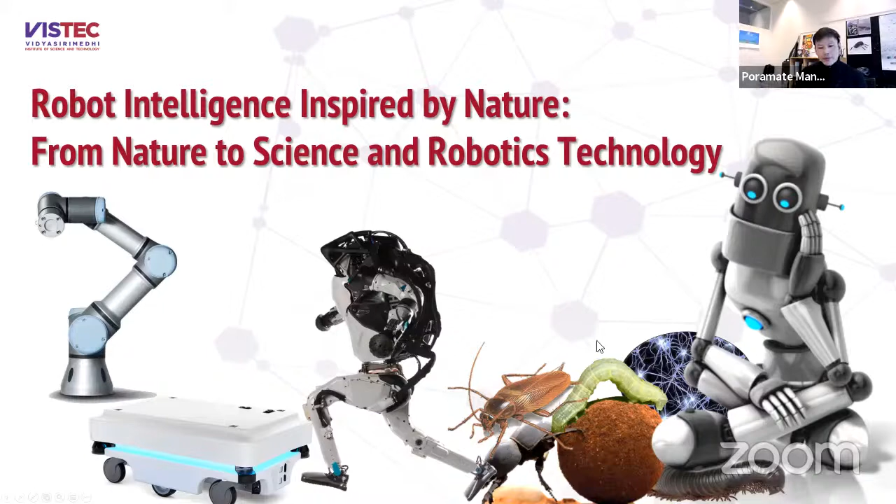But today, I'm gonna give you another aspect of robotics where instead of having an industrial arm or a mobile robot like this or even humanoid robots, we're gonna look at smaller living creatures like the animal here. So this is what we call bio-inspired robotics.

So basically in this area, people start to look at how we can understand nature, how nature moves, how animals can perform highly complex behaviors and locomotion. And from that, we can try to translate our understanding of animals or living creatures into robotics. That's what we call bio-inspired robotics, such that we can achieve new robotics technologies.

On the other hand, we can use this kind of robot to answer some hypotheses from bio studies, and that's what we call biorobotics. So basically, that's a kind of engineering-inspired biology. Today, I'm gonna try my best to walk you through three interesting living creatures.

The first one is a cockroach. This is a very little insect with 6 legs. Another animal we are working on is what we call a dung beetle. This dung beetle is a very interesting animal because it has 6 legs, and not only for walking like a cockroach as you see down there, but it can also use the remaining legs to move a very heavy ball.

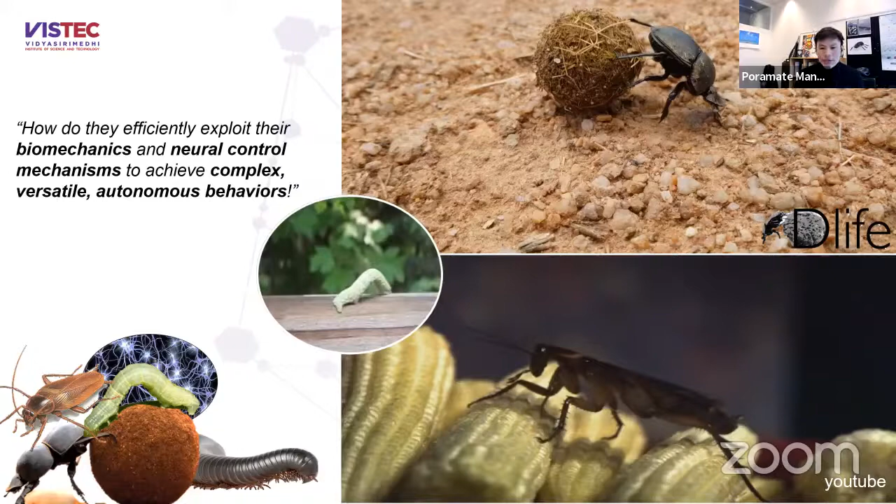And we want to understand how these kinds of living creatures can show these kinds of complex behaviors. So if you look at the principle of animal locomotion, basically we can see these two components, the first one and the second one here. So these are two main components. The first one here is about the biomechanics. Okay, this is the one down here.

Biomechanics is basically the physics or the physical body of the living creatures that can perform actions and also can perceive information. It's like the body of the animals. While the body can perform the complex behaviors, the brain, which is on top here, could also generate complex motor commands to move the body. That includes the high level control here and the locomotion control. So the locomotion control is the control that lets the system move, while the higher level control coming from the brain can try to steer the moving behaviors for complex navigation, for example.

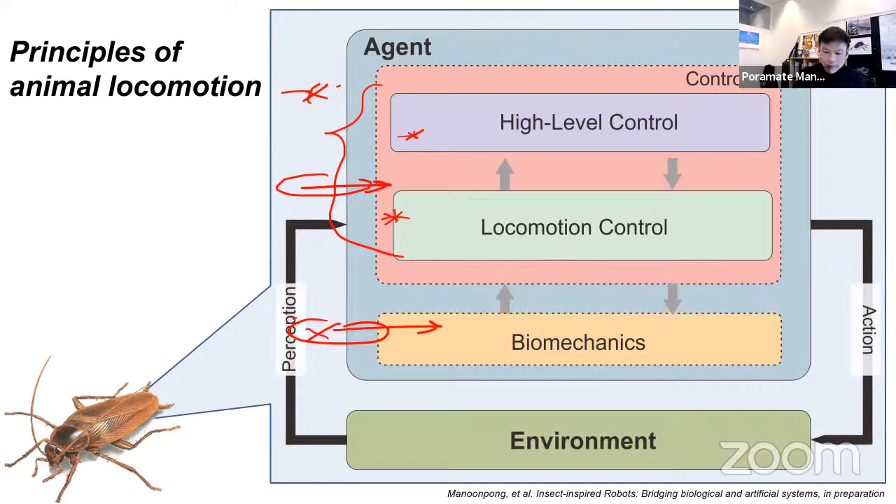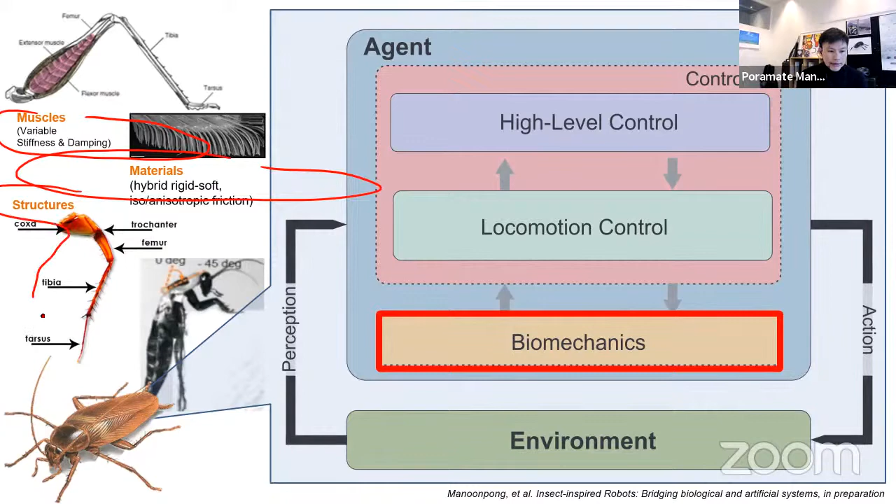And here is some information on biomechanics. So the biomechanics in principle consists of not only the body, but we cover muscles, the materials, and also even the structures, how the structure looks. Okay. While for the locomotion control, in this case, we look at the nerve system of the animals, and this nerve system can form the locomotion. It needs to coordinate these six legs. When the animal needs to be able to move, the nerve system should be able to coordinate these six legs to generate walking patterns. On top of this, we see the brain of the animal here.

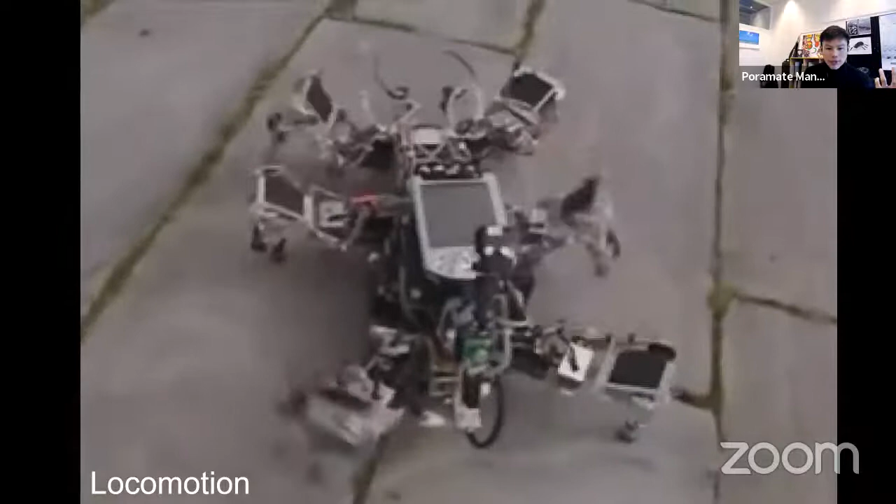And if we look inside the locomotion circuits, we basically see the neuron system. So we see many neurons that talk to each other through the synaptic connections here. And what we have achieved over my 15 years of research, we managed to translate this complex neural circuit from the animal into a digital circuit, if you like, for robot locomotion control. So by having these neural-like networks, we can achieve locomotion of hexapod robots that can mimic the locomotion of a cockroach. It can walk with six legs and it can change the locomotion patterns. When it comes to different terrains, it can change the gaits from a fast gait to slower gaits for more stable locomotion.

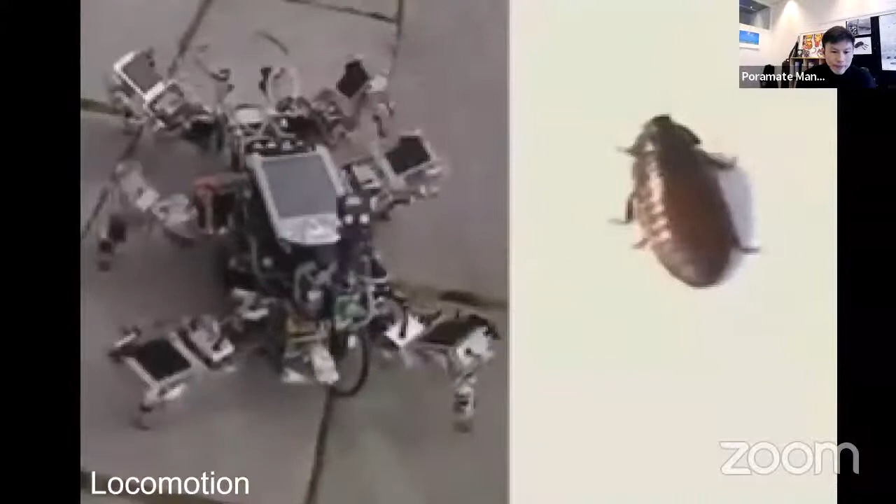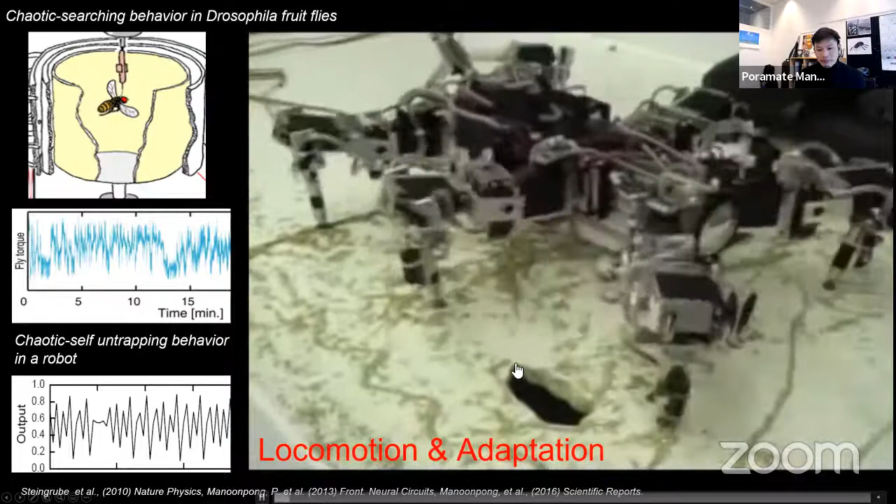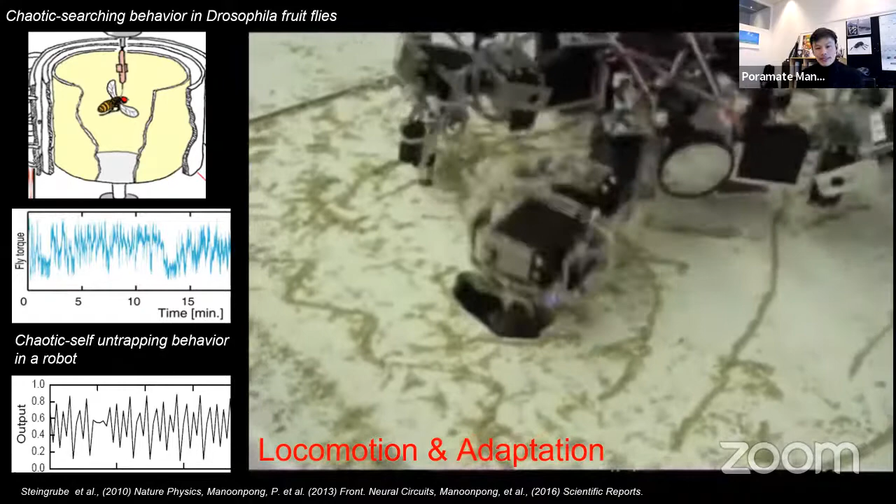We published this work in Nature Physics, showing that by using these bio-inspired strategies, we can let the robot free itself: when it walks and suddenly one of the legs steps into a hole, we let the system switch from normal locomotion into chaotic behavior. By having this chaotic-like movement, the robot can by itself release the leg out of the hole. So now this is in the chaotic mode. And now suddenly after a few trials, it can just release by itself without human interference.

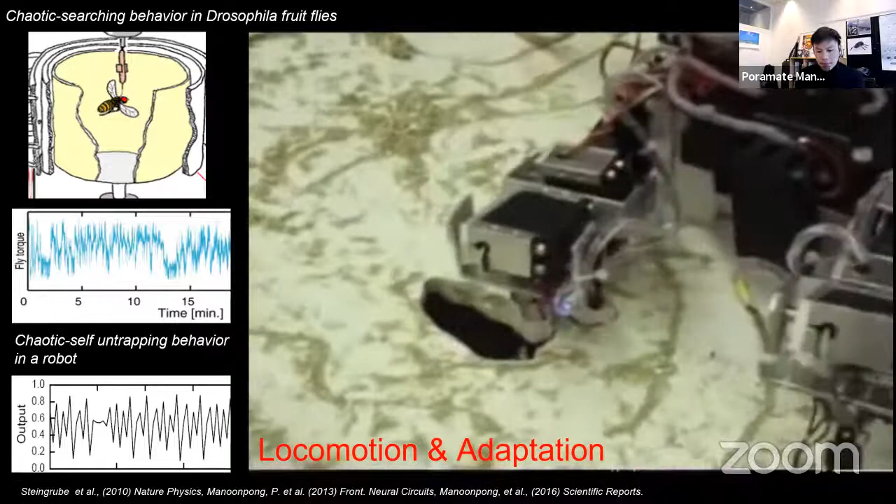And I think this is the beauty of nature, that we can learn from nature, extract our knowledge, and translate from nature into real machines to make them have more complex and more adaptive behaviors. Additionally, while we can achieve the basic locomotion, we could also generate even more complex behaviors. In this case, imagine if you need to walk from one location. Let's say this is the starting point, location A. You need to walk up to this point, okay? And then when you come to the junction or decision point, you need to either turn left or turn right. Imagine if you need to navigate from Siam to Chulalongkorn, for example.

For the first time, if you don't know how to walk from Siam to Chulalongkorn, you might use the road sign saying that, okay, if you see the first corner, you should turn right because you see the road sign of Chulalongkorn on the road.

What we try to mimic with this concept is that if you come to the decision point, you need to remember that, okay, let's say the road sign is here, saying Chulalongkorn, you should turn right at the next corner, for example. The problem here is that if we cannot remember this road sign, we cannot turn right at these corners, okay?

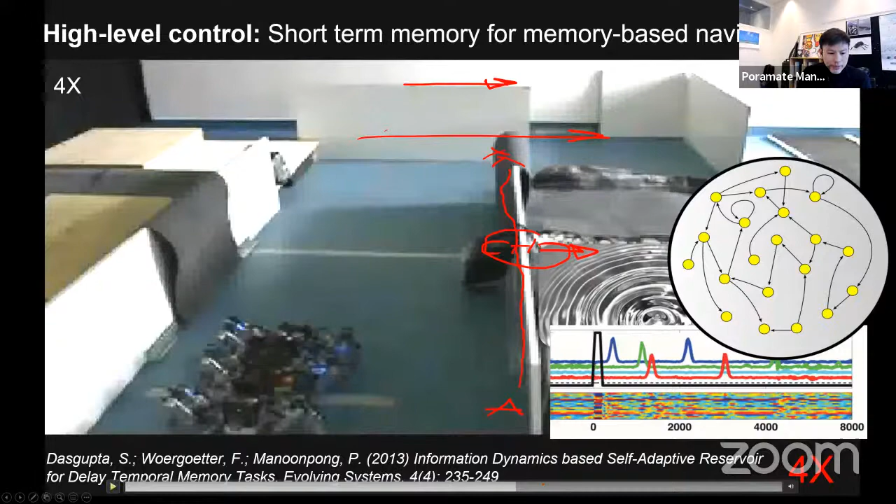At this point, when it comes to these corners, okay, here at this point. So when it comes to this point, we turn on another light on the left side here. This second light indicates that at the second corner, it should turn left because the light is on the left side.

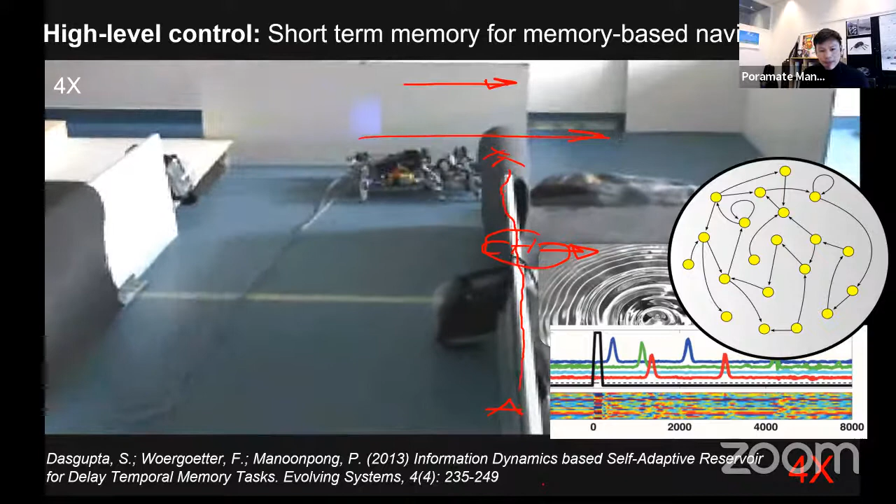So because of this, we succeed to activate the sequential memory-guided behavior. First, it turns right because it saw the light on the right side, and then it's going to turn left because it saw the second light on the left side. So this is a kind of high-level control that is controlled by the memory capacity of the robot.

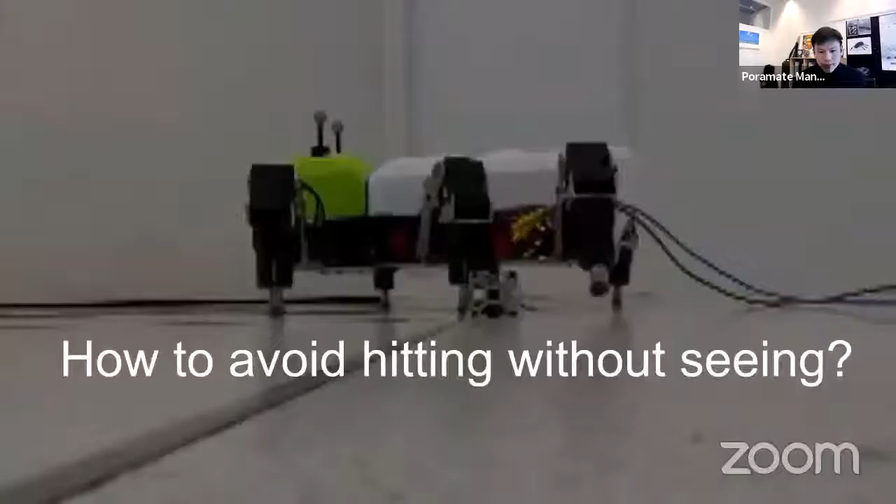The second problem we are looking at is work done by my student at VISTEC. Imagine you have a robot with many legs, let's say three legs on each side, so in total six legs. If we let this robot walk, since the robot has only the eye at the front, only when the hind legs hit the obstacle can the robot swing the leg in the air. This is a problem in robotics because you want to avoid the robot getting damaged.

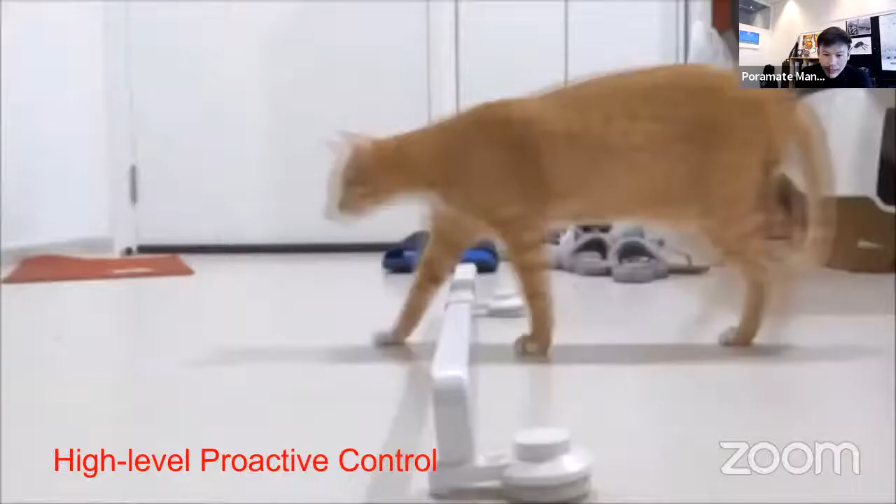If we have only the camera sensor at the front and no camera here, the robot cannot see the object in advance. You need to hit it in order to feel that there's an object, and then it can swing the leg and avoid the obstacle afterwards. How can we solve this without hitting the obstacle, letting the robot swing the leg over the obstacle before hitting it? We got this inspiration from cats.

Look at this cat video. The cat can see the obstacle here first, and then it can remember this obstacle and later execute. If you look at this video one more time, you see that the hind leg doesn't hit the obstacle at all. So the cat can effectively navigate in an environment where there are many obstacles.

The trick the cat uses, as people have found out, is that it can see the obstacle here, the same thing a human can do. It uses this information and stores it in the brain, okay? Afterwards, it doesn't see the obstacle anymore. When it comes closer to the obstacle, the brain activates the leg movement based on what it has seen before, okay?

The nice thing is that the brain can activate the movement of the front legs and later the hind leg at the right time, okay? The question here is how can we achieve this kind of memorization, and use those memories to activate the leg movement for robots.

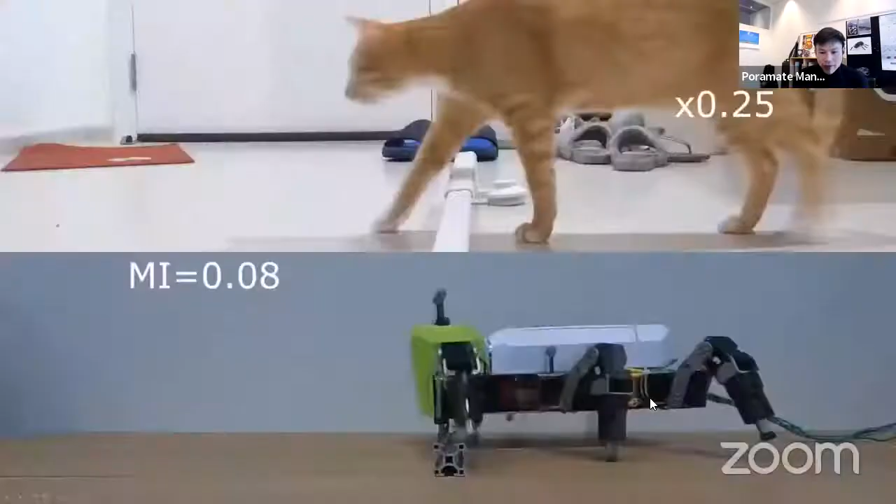Here is the work of my PhD student at VISTEC. We managed to develop the neural control, or artificial neural networks, for the robot. In this case, instead of using cameras, we let the robot feel the obstacle first with the front leg. The front leg will hit the obstacle, and this hitting information is transmitted to the brain of the robot. Afterwards, the brain will remember this information and release it later to let the robot swing the middle and hind legs at the right time.

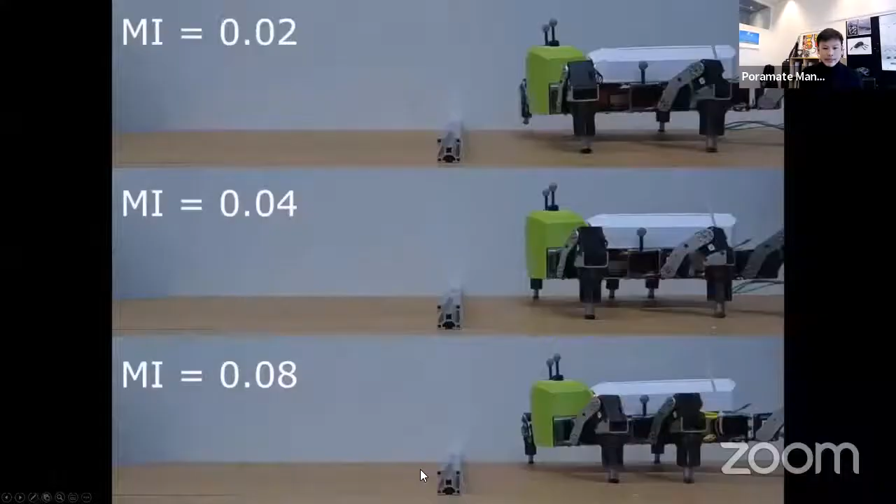As you can see here, the robot comes and the middle leg doesn't touch the obstacle at all, and neither do the hind legs. It can swing over the obstacle at the right moments. And if you change the locomotion speed, the robot can even learn. In this case, the front leg hits the obstacle to get this information, while the middle and hind legs can successfully step over the obstacle without hitting it.

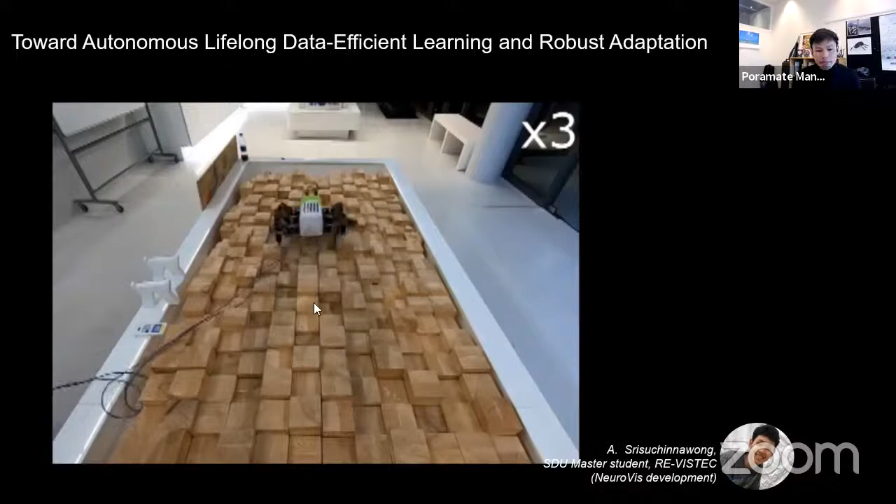Okay. Once we have this kind of proactive behavior, and proactive means that the system can react a little bit earlier before coming to that situation, we let the robot navigate in this kind of maze-like terrain, uneven terrain with many wood blocks. The robot can successfully and efficiently navigate by stepping over the obstacles, and at the same time, oops, maybe I just show this.

Okay, maybe the video is freezing, but anyway, let's just wait for a few seconds. Otherwise, I might just switch off the presentation and switch it on again. Now it seems to be freezing. Let me end the presentation. I will open it again. Okay, I'm sorry for that.

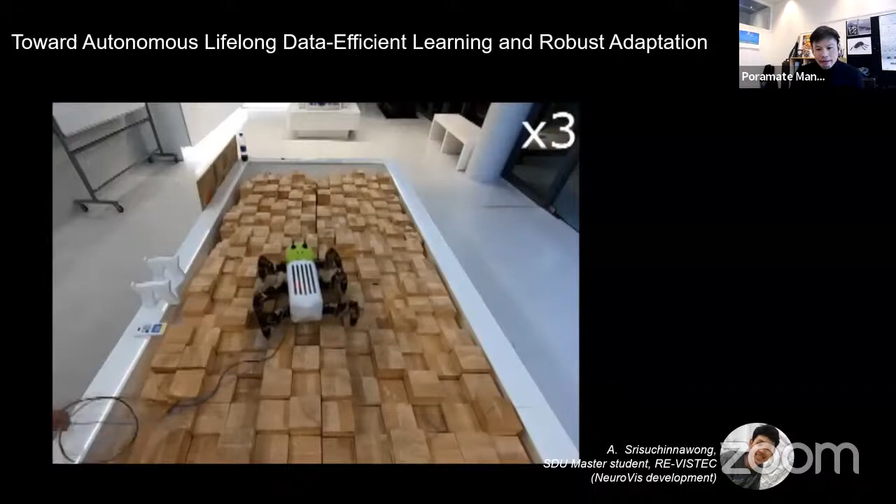What I discussed before is using a bio-inspired approach, the memory in the brain of the robot, which is inspired by the cat, and using that information for activating the locomotion afterwards. And here, when it navigates on the terrain, we developed what we call neural visualization. This is a visualization that can monitor the real brain of the robot.

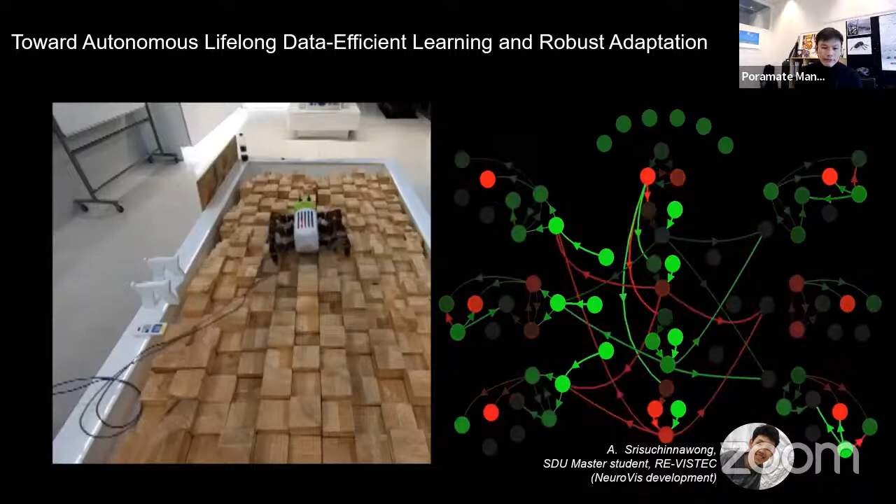While the robot moves, we can see the neuron activation in the brain, so that we can understand what the robot thinks. That is one of our aims: we don't want to build just a machine that can perform complex behavior, but we want to understand how it thinks, so that we can later trust the machines when we use them in real-world situations.

The next problem I want to touch on is, let me check the time a little bit. Okay, good, we are still on good time.

The next problem I want to touch on: I'm saying that the brain is really important to have complex behaviors. However, you could solve some complex tasks by only changing the body, okay? What I want to show here is that we try to have this robot walk on a narrow path, like pipes. We put the pipe and we want our robot to walk along the pipe.

What you can see here is that if we just use the normal foot of the robot, this small foot here, each foot has a very small tip and creates a very small contact point with the surface, so it will be very difficult; the robot cannot walk precisely on the pipe, and the robot will fail. To solve this problem, we look at nature.

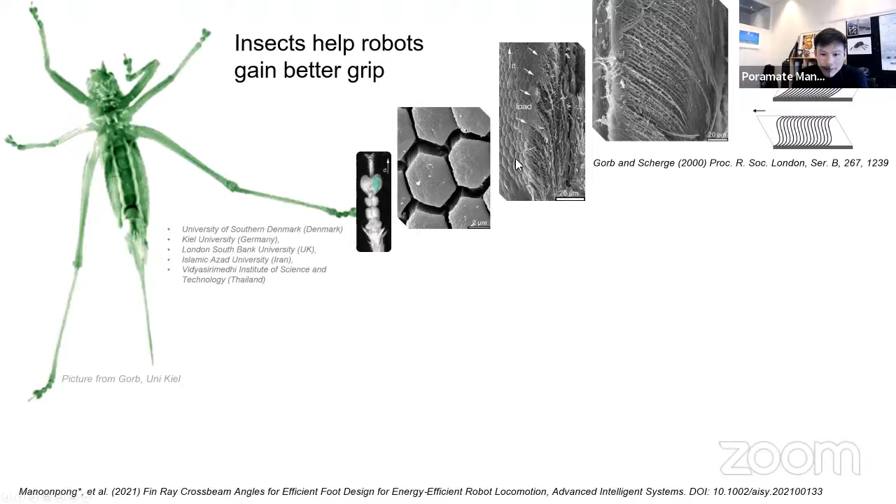So we further look at the foot structure of the insects here. If you zoom in on the foot structure of the insect, you can see fiber-like structures inside, underneath the foot. Having this kind of fiber-like structure, the insect could easily deform its foot to curve on the surface without complex control problems or complex control signals.

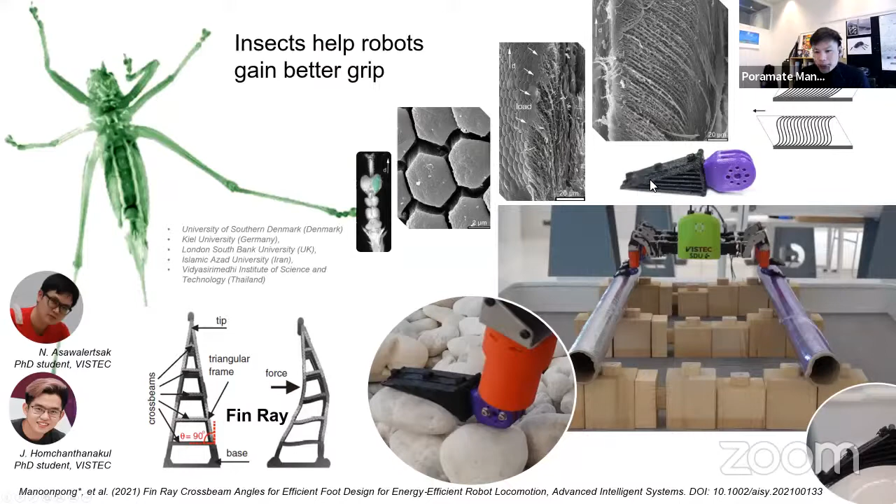Taking this as our inspiration, we developed the foot of the robot, which has fibers like this with a certain angle, printed with 3D print material. This is what we call fin ray-like structures.

What we've shown here is that not only can we use the insect-inspired fiber structure with a certain angle for the foot, but we also note that people have known this kind of structure for a long time: if you have a triangle with a fiber inside at a 90-degree angle, this is called a fin ray. This is a traditional fin ray structure that people have used since 25 years ago, and people keep using this 90-degree fin ray structure.

The nice thing about this is that if you push the fin ray with a force, it tries to curve towards the force. Because of this, if you put the fin ray on the foot of the robot, when the foot experiences a normal force, the fin ray can curve along the surface like this.

However, we found that instead of using a 90-degree angle, we learned from insects that they don't have this 90-degree angle but rather a different inclination angle. We looked precisely at how having a different inclination angle could benefit the system—instead of needing high force to bend the foot, you might need a lower force because the structure can deform more easily. We found that instead of 90 degrees, using just a 10-degree angle works better.

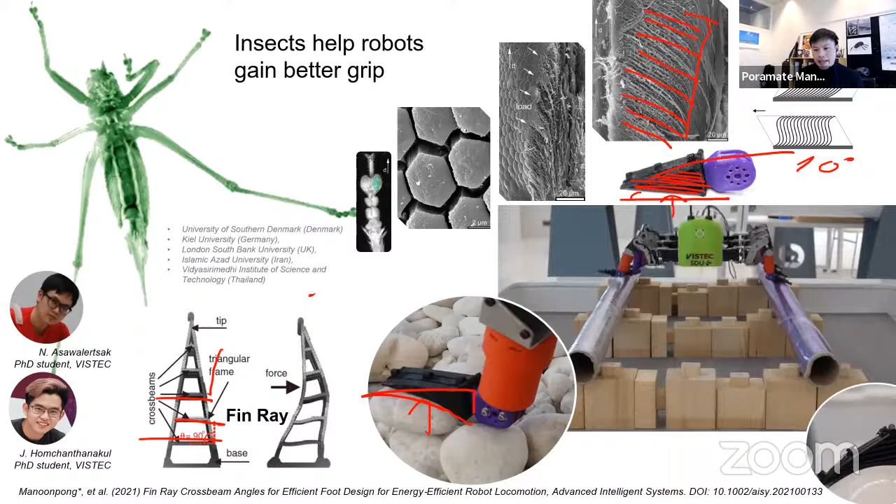From the horizontal line, by having this structure, we successfully let the robot use much less energy and nicely grip the surface to stably locomote. This is the work we just released or published at the beginning of this year, or end of last year.

This work has also been applied—instead of using the fin ray-like structure with the insect-inspired fiber angle for the foot, we show that you can use this as a gripper. Having this kind of gripper, you can grasp objects or grasp fragile objects efficiently.

On the other hand, if you use a traditional stiff gripper, it could destroy this kind of crispy or fragile object. If you use a standard gripper with standard plastic build, it could easily destroy the object if you apply the same force.

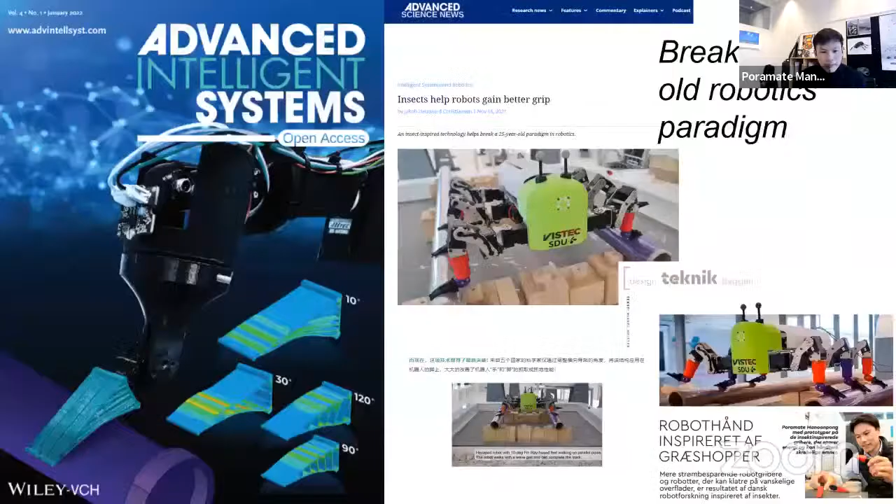Because of this novelty, we got a press release of this work, and it was on the front page of the journal. We propose that we can break the 25-year-old robotics paradigm by introducing this new way of looking at the inclination angle. Instead of using 90 degrees, we show that you can incline this angle to a different degree, inspired by insect feet. By having this new type of angle inclination, you require less force to deform the foot, so the system can walk or behave more energy efficiently.

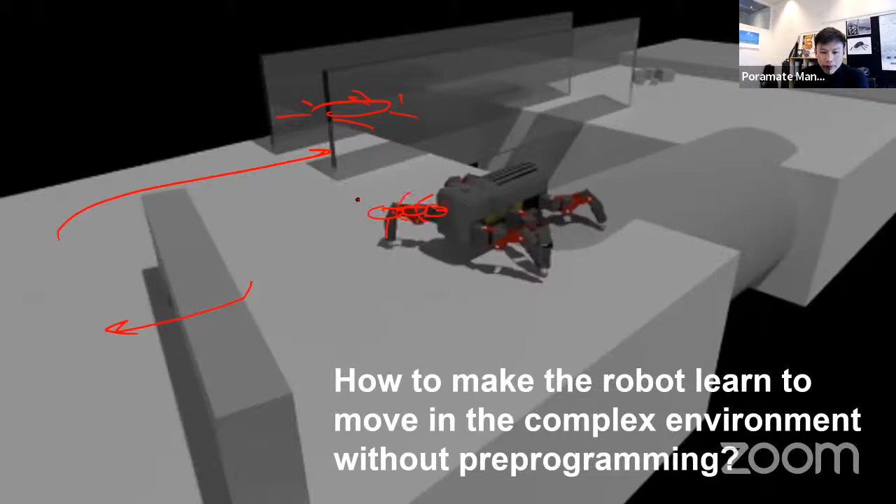So that is a very difficult problem. If you try to think about programming the robot, especially this robot, it has 6 legs, and for each leg it has 3 motors. So if you're an engineer, you need to sit down and think about how to move these 18 motors in total, such that the motors move in a way to make this robot walk on this kind of platform.

Instead of sitting down and trying to think about how to program this, can we come up with automatic programming? This is in terms of machine learning. Can we let the robot learn by itself, without pre-programming or predefined behaviors, that it needs to climb or walk underneath this, climb along the side wall, or even climb over this big pipe? Can we let it think or find out by itself? And the answer is yes.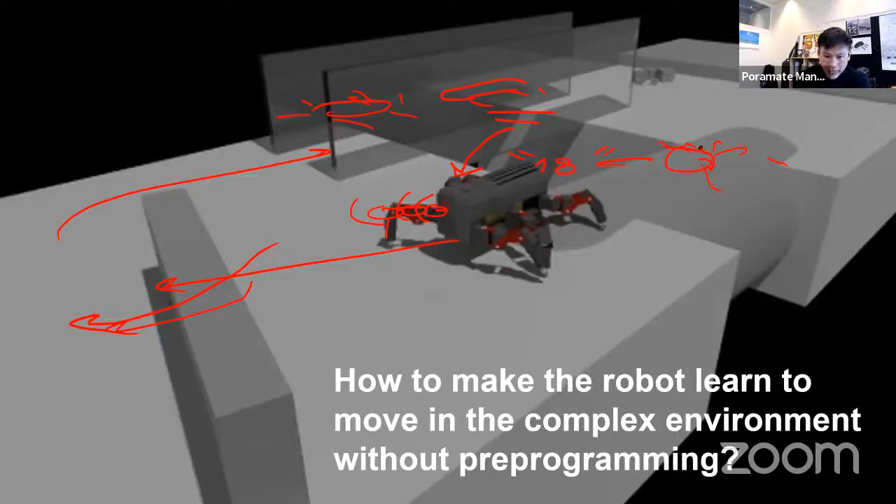People have done that over the last 10, 20 years using machine learning techniques. For example, there's a work published in Nature in 2015 where they used simulations to let the machines try to learn by itself. The problem with the traditional technique is that you need to run the computer for at least 2 weeks to get good behaviors, and even multiple complex behaviors that you can reuse later. Later, in 2019, there's a really impressive and nice work.

In 2019, they used another machine learning technique called reinforcement learning, to let the robot learn from scratch, to be able to walk after a certain number of trials. In this case, they decreased the time from 2 weeks to 10 hours, and there were also other works published in Science as well. Now we challenge ourselves: can we reduce this learning time even from hours to minutes? Because in the real world, you cannot wait for the program to run for weeks or hours to get a solution and reuse it.

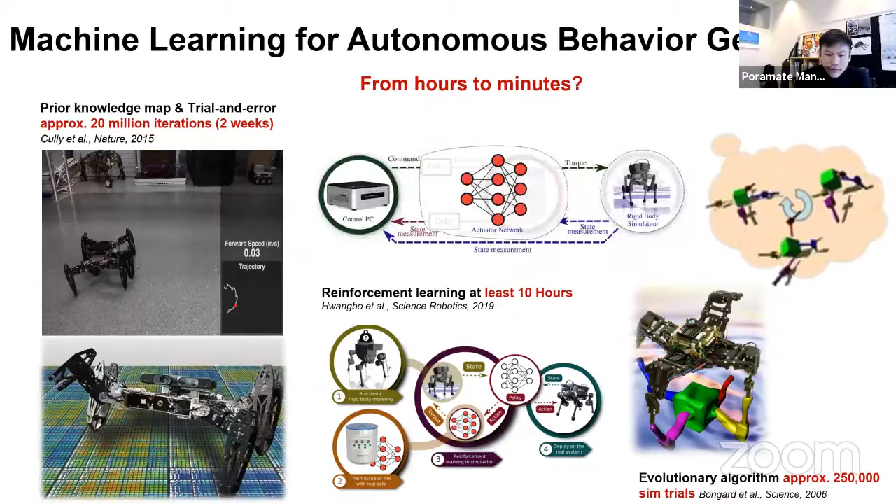So we came up with what we call bio-inspired structures. These are neural structures that we learn from nature, the few ingredients or neuron structures that nature or animals need to generate locomotion. Based on that information, we try to create these neural network structures as the basic structure for the system.

And then we use, on top of this, a fast machine learning technique to let the robot learn by itself. Using this approach, we can reduce the learning time from weeks or hours into minutes. We managed to let different robots learn to walk, like this dung beetle-like robot, or hexapod robot, or even quadruped robot, learning within 13 to 15 minutes. And excitingly, we recently also managed something more.

This is the kind of pattern that the learning system tries to shape while the robot is walking. Excitingly, we found another improvement on this - we can even reduce the time further. Now we can manage within less than 10 minutes.

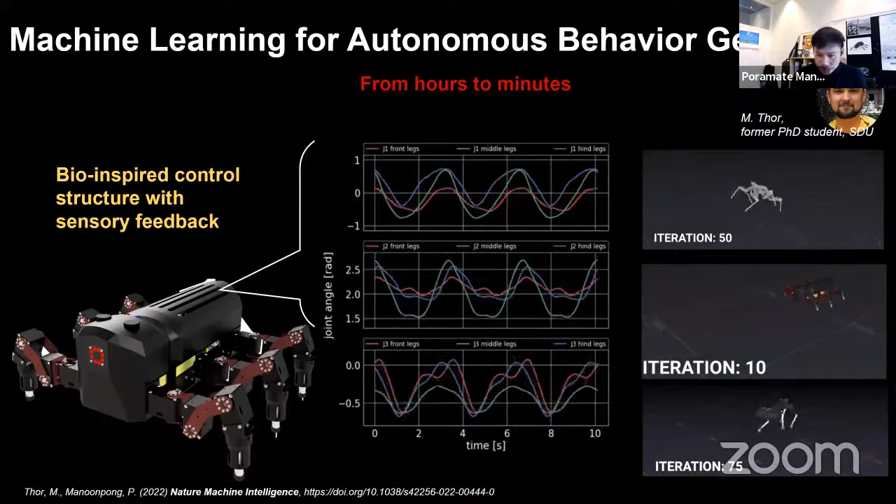It can also step down from obstacles, and if it comes to a higher obstacle or different steps, it can manage to do that without relearning. So that's the kind of efficient behavior with less data that we achieve, managing to reproduce complex behaviors.

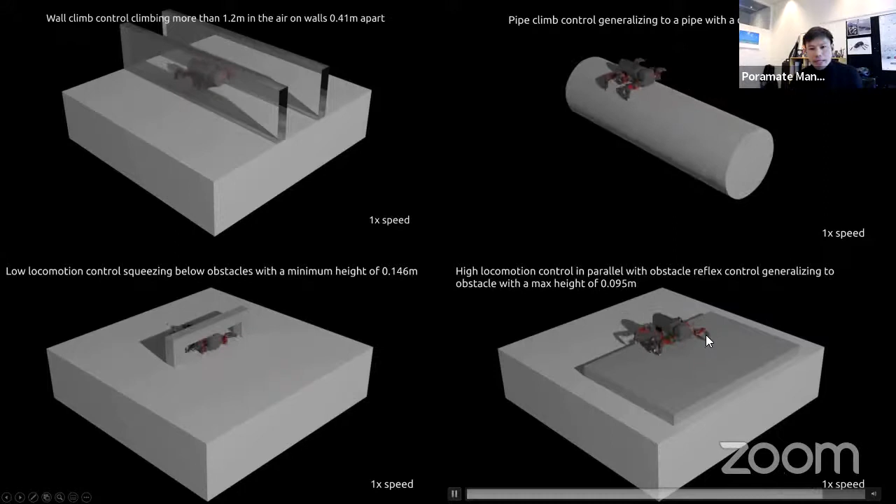Afterwards, we implement these learned behaviors into the robot. This is the simulations. Now we are working on testing this on the real robot.

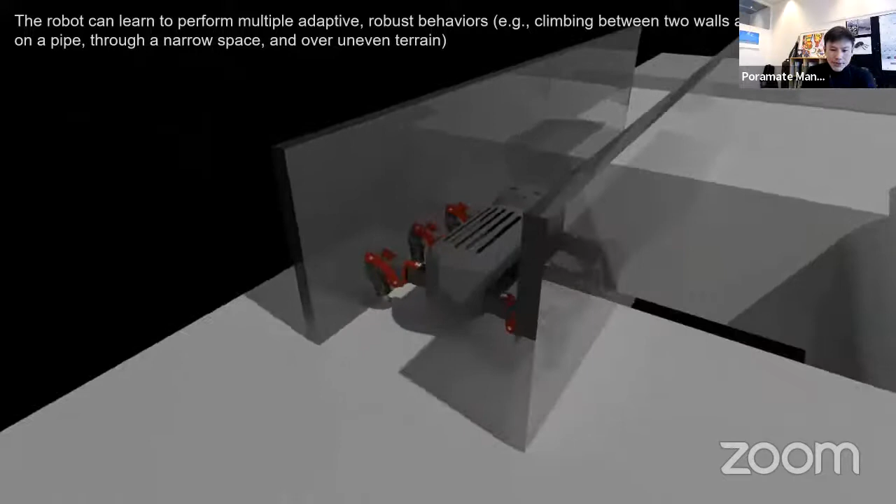So the robot, once it sees the walls, in this case, as a higher level control, we use this to activate these behaviors. The robot starts to use its legs to push against the wall such that it can have enough friction to hold itself while walking along the side wall. Let me go a little bit faster.

Now when it sees obstacles, it can increase the body height and then walk over the obstacle, or even step over the obstacle like this. Let me go a bit faster here. It can also even go down the ramp. And when it comes to the pipe, the legs need to change the pattern so it can curve itself to stay on the pipe stably and be able to walk along it.

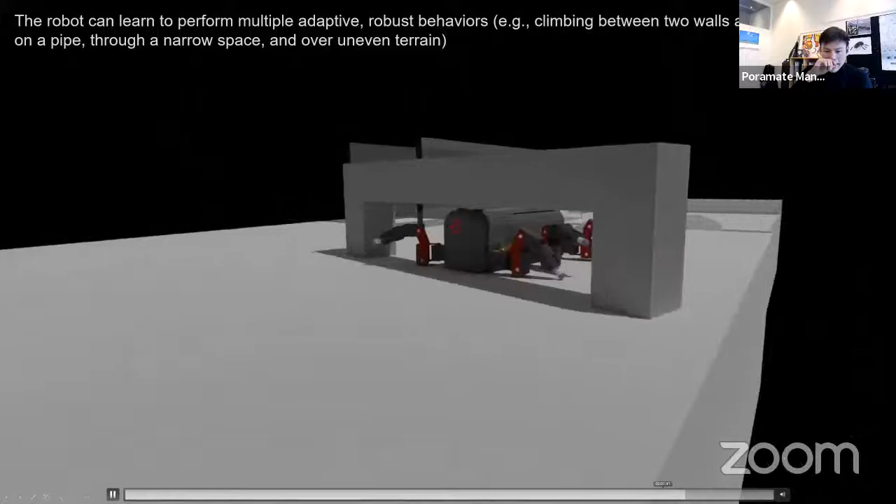And when it comes to this kind of obstacle, it can lower the body down and activate the new learned behaviors that it has learned before.

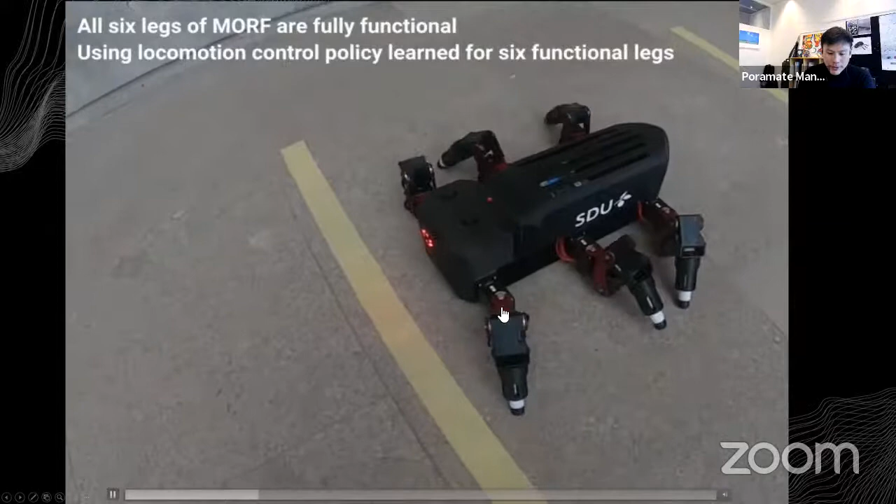With this approach, we test what happens if we let the robot walk, and you will see that when it comes to this point, we activate the program saying that this leg is broken. Now we lift one leg, so the robot basically walks with 5 legs.

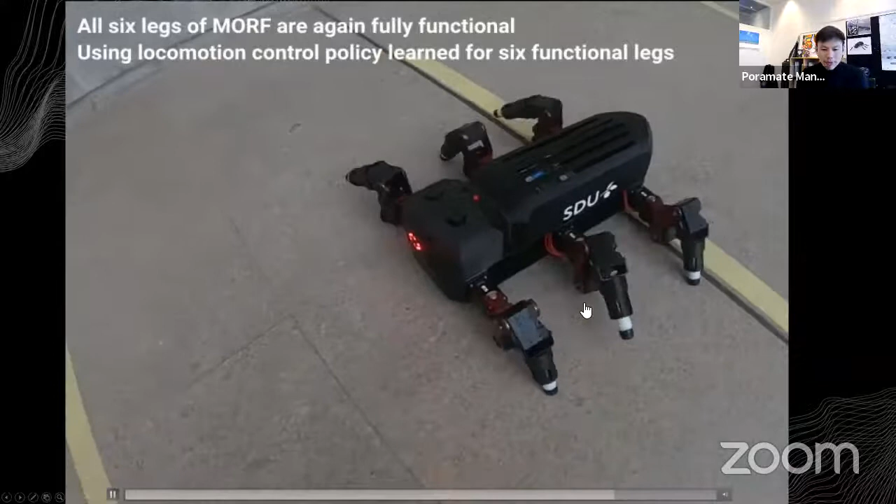With this control technique, the robot can efficiently readapt to get the new locomotion behaviors. Even now we reactivate the leg back and it comes back to 6 legs, so it can nicely and robustly walk even when it has a broken leg.

With this work, we got the press release again at Nature Machine Intelligence beginning of February, along with other press releases on that.

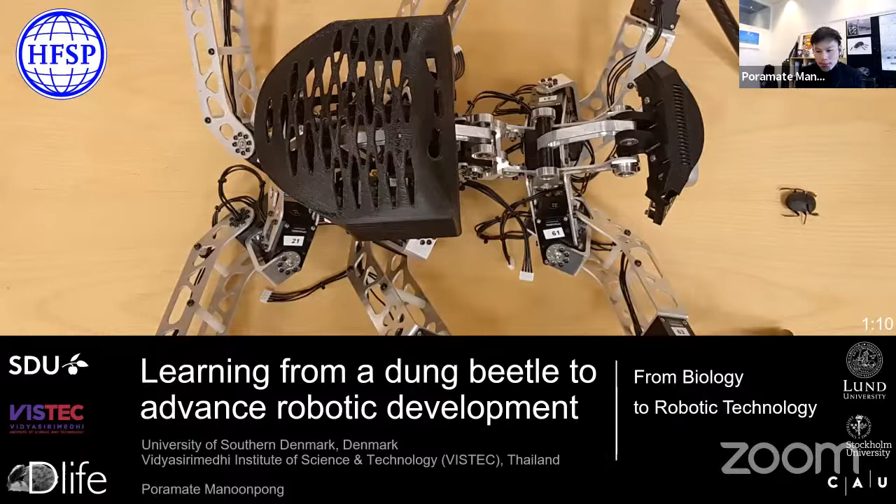So the next project I want to share with you is about the dung beetle project. This is a European project, and I'm working together with other universities in Sweden, with Lund, Stockholm, and Kiel universities.

What we look at here is these little insects, the dung beetle, and this is the robot that we built based on this animal. You can see the robot is like 10 times the size of the animal.

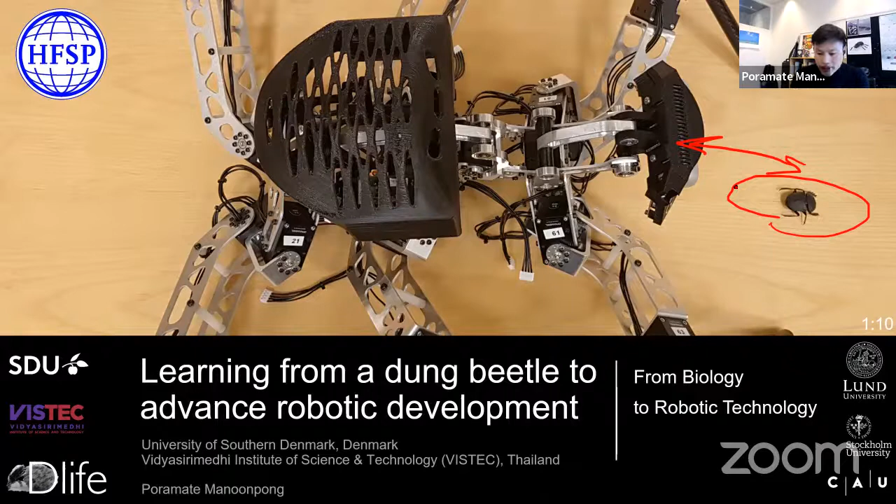This is our research team, and Binggwong, my PhD student at VISTEC, who is working on the locomotion control of these dung beetles. These are other project partners from Germany and Sweden, and also my colleagues in Denmark. They are also involved in these projects.

Basically in this project, we try to learn from nature here, we look at how animals move. First, we want to look at the inside structure of the animals, their biomechanics, and then we try to replicate these structures into robotics models. We also want to get the locomotion and navigation behavior of this animal into robots.

So I will show you some results today. If you look at the video, this is very impressive. This is the work we did in South Africa.

We flew there about two years ago, and made a video where we built a small ramp and let this dung beetle try to roll the ball. As you can see, when it rolls the ball, it's basically walking backwards, using the hind legs and middle legs to push like fingers or arms pushing the object, while the 2 front legs act as normal legs to walk or transport the ball.

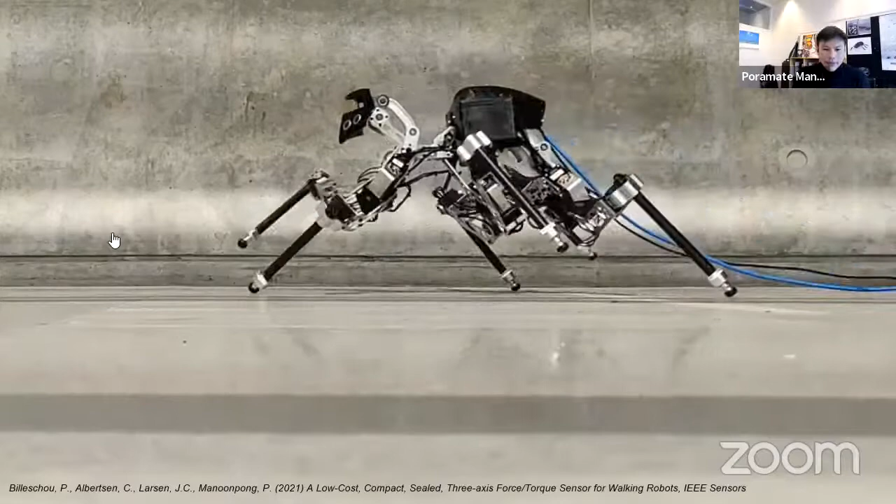And we can see that the locomotion that the robot performs and the dung beetle performs is quite comparable. It performs like a tripod where 3 legs here, here, and here stay on the ground, while the other 3 legs here, here, and here swing in the air, similarly to the robot that we could replicate from the animal. And now we test on the real robot to see the locomotion behaviors.

So the next thing is, what about rolling a ball? We can see that the dung beetle can walk. And what about rolling the ball? So what we did here is look at the video of the dung beetle rolling the ball. We performed visual inspections here. And after looking at the video for many hours, my PhD student Binggwong, he's really clever, came up with the 4 rules.

After looking at this dung beetle rolling the ball, he came up with 4 rules, and this is the first time we discovered that. So these are the 4 secret rules that we proposed and published in Scientific Reports. We found that in order to succeed in rolling the ball, the dung beetle's 2 front legs, the left leg and the right leg, perform alternating behaviors. They try to step not at the same time. That's the first thing.

The second thing, we found that the middle legs here, the left and the right leg, also try to step differently, but the middle leg and the hind leg on the opposite side try to synchronize with each other to step at the same period, like this crossing here. According to that, we tried to translate those rules into our robot simulations to see whether we could at least make the robot roll the ball.

When we look at this video here, okay, so it might be that I have to again, sorry, I have to restart my presentation again. Okay, so let me reopen that. So basically, when you see these behaviors of the dung beetle, it can navigate and interestingly search for the locations here. Okay, so now it's back.

So the dung beetle can first perform random moves to search for the food source, and once it finds the food, it tries to move the food back to the spot, or the nest. And here, the first time, it might miss the spot. And then it tries to wander around to search again. Now it found the location.

Then the next time, interestingly, it could come immediately, very straight, to the food source. And now from here it just goes very straight back to the food source. Sorry, the home. Okay, now here.

So after looking at this, we ask ourselves how such a little animal can realize these robust navigations. The first thing is that the dung beetles don't have GPS like what we have. Right now we use Google Maps, we use GPS to say where we should go or how we should go from A to B, right? So basically we just follow the GPS. But interestingly, dung beetles don't have GPS.

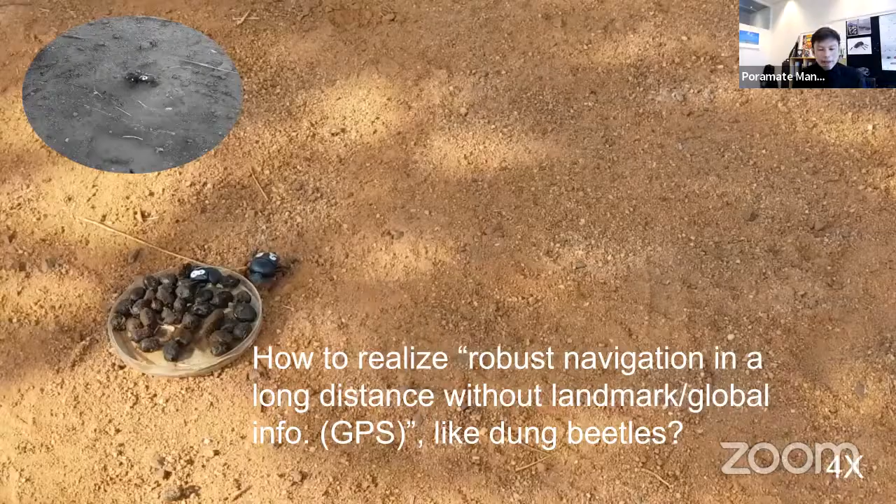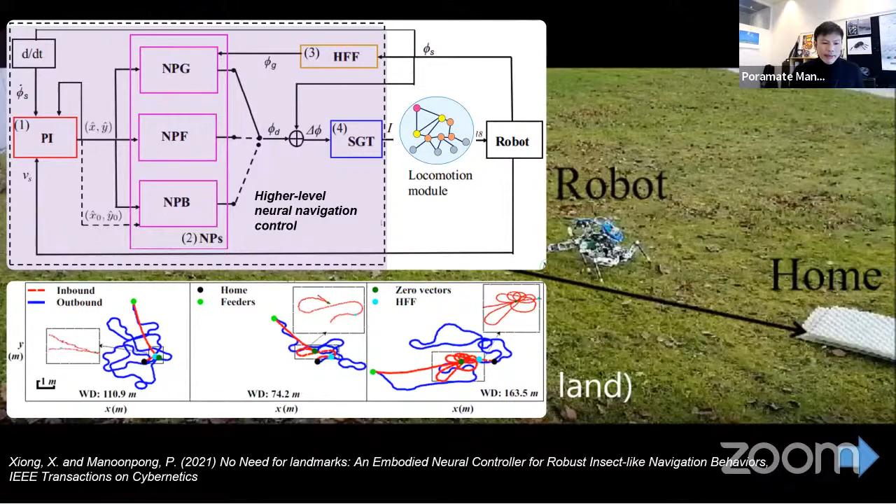The question here is how could they first search for the food source, and after that, how can they remember the path back? To realize this, we developed this kind of control technique. I will not go into details. This is the work of my former postdoc. We introduced a new control technique that captures and remembers the path that the robot has been, and then reproduces those paths with the final vectors.

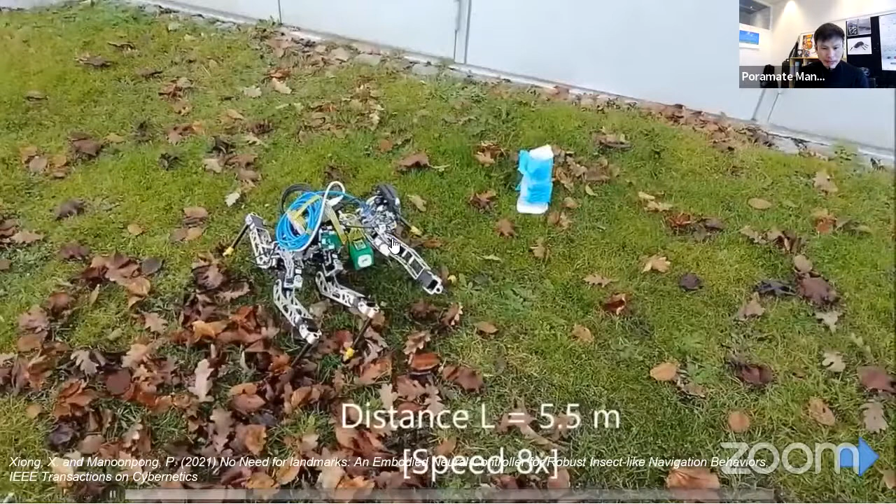So here with this technique, you will see that the robot first just performs a kind of random move, and when it sees an obstacle, it just turns away. Now it moves, and this time it sees the object, which is the food. Once it sees the food, we say that now you need to go back by walking backwards to the home, like the dung beetle, and now it walks more or less straight back home. So that is the path. It moves, and the red part is the final part where it navigates back.

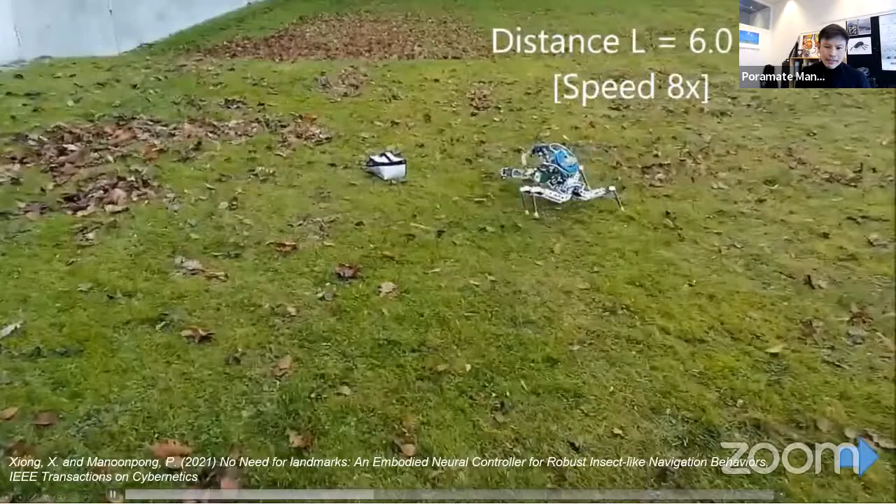And this is another test. The robot walks from the home to the food, and then when it walks back, in this case it starts to deviate, and after it starts to deviate, it can correct the walking behaviors or the navigation path by itself to successfully come back home here. So the red part is from the food source or the target back to the home.

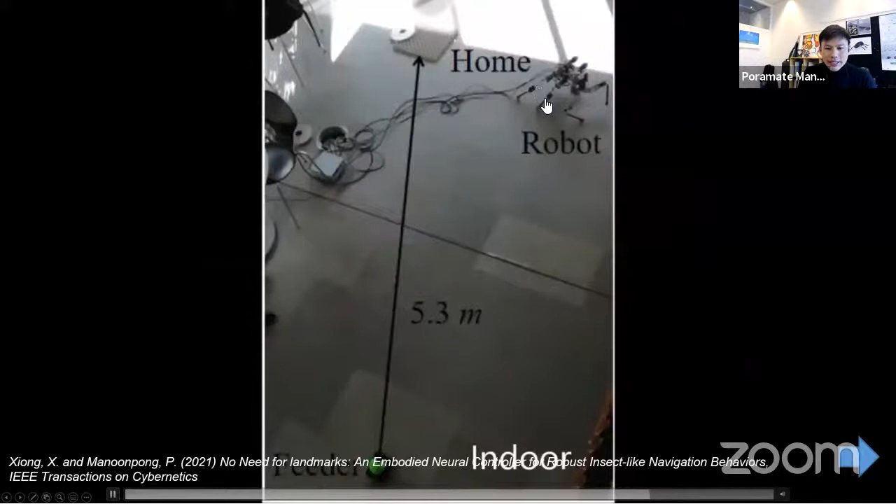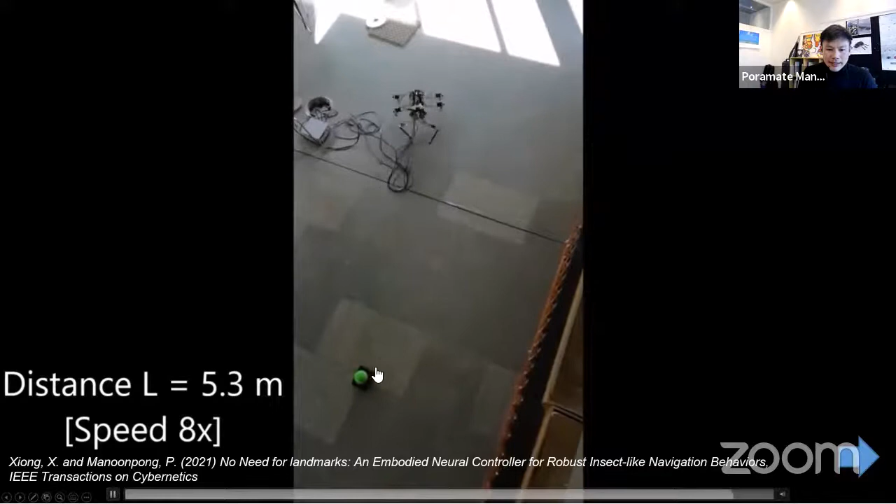And here we test indoors. In this work, we don't use GPS. We use the so-called path integration technique. So here it moves, it sees the ball, and then it just walks backwards home. Okay, so I believe that type of technique could be an effective technique that we could later use for navigation, such that the robot, or the car, could navigate reliably without GPS in case of going into a tunnel, for example.

So this is another work I want to share in terms of the pipe climbing robot, when you want a small tiny robot that can perform pipe climbing for pipe inspection in the oil and gas industry. The typical technique is that you either use inspectors to go there and inspect the pipe, or you build a robot that crawls inside the pipe. If you use the robot crawling inside the pipe, you need to stop the plant, and that will be time consuming and kind of expensive, or even use inspectors.

So we came up with a new technique, another solution where, instead of using humans or putting the robot inside the pipe, we build a worm-like robot such that the robot can crawl on the pipe. We got inspiration from the worm. We look at the worm, and the worm can nicely walk on top of the tree branch. And this is our worm-like robot.

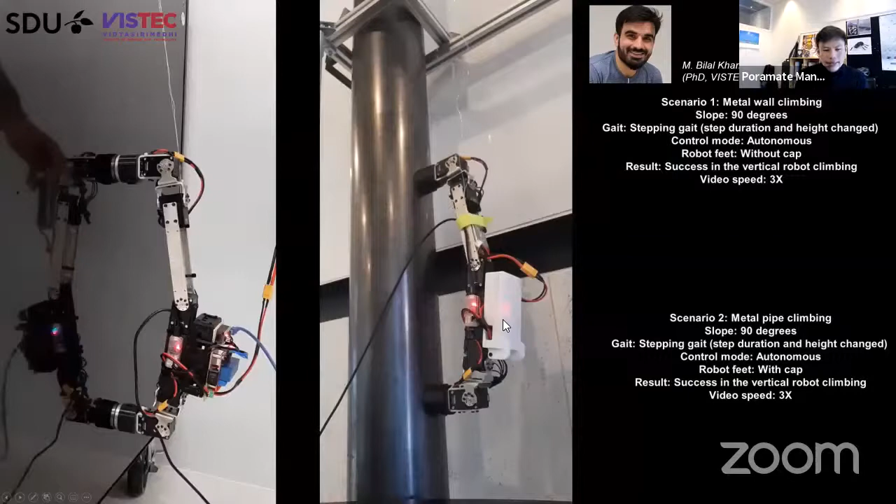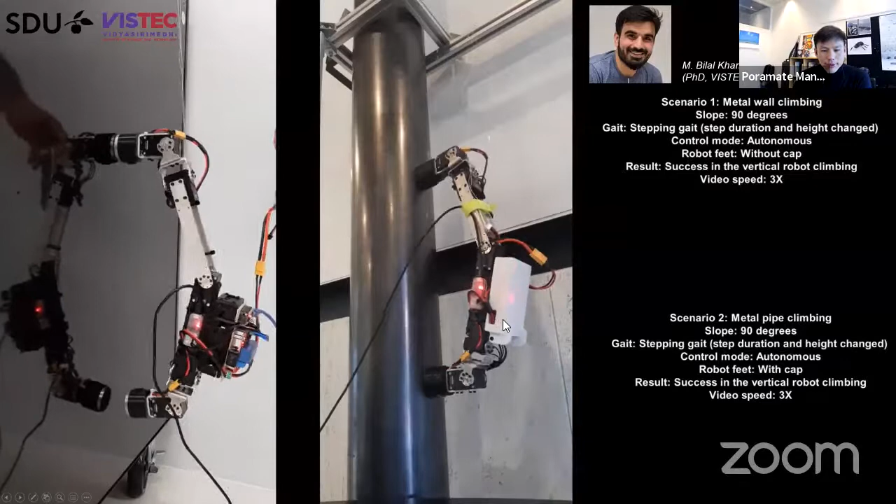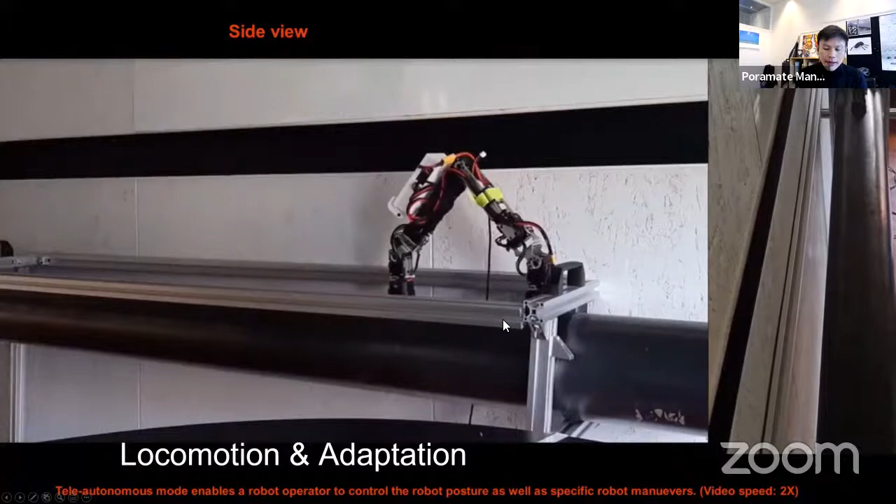And here we use electromagnets as the feet of the robot, since in this case it needs to navigate on the steel. So with this kind of worm-like structure and electromagnets, the robot can stick on the steel. And if it sees an obstacle here, it can step over the obstacles. So that could be a potential machine for inspections in the oil and gas industry.

So that's what I have shared with you. Basically, we look at nature and we learn from nature, and then we try to gain our scientific knowledge from learning from nature, and then we want to go from nature to science and build up our new robotics technology for humanity.

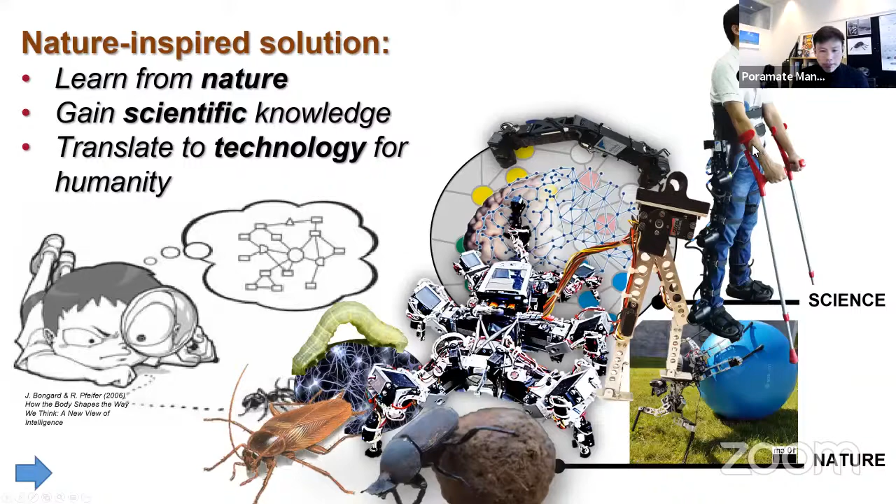So now I have a few slides to share. For example, here, this is the work of also my PhD student at VISTEC. So now we scale it up from insects to human-like locomotion. So this is the work where we have bipedal robots. And the problem here is that we want to build machines for rehabilitation for patients who had a stroke, when they walk with different step lengths, or basically their walking gait is a kind of asymmetry.

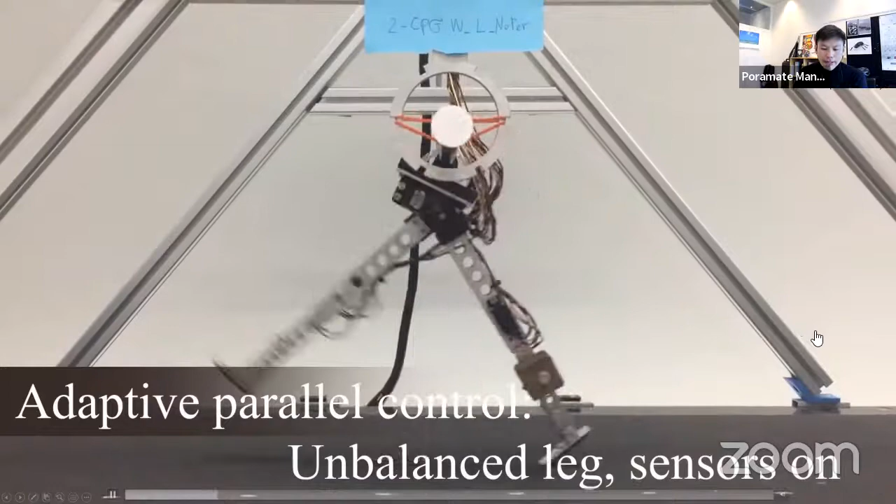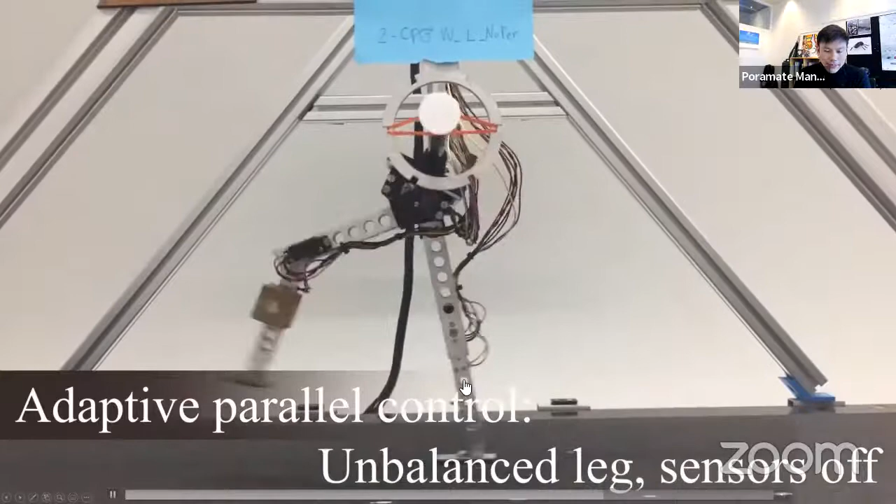So to develop the exoskeletons or the robot that can assist non-equal gait locomotion of stroke people, we start from looking at this simple bipedal robot. And in this case, we use the mass at one leg to make asymmetry patterns. So basically the left leg and the right leg are not equal. Okay, they have different weights. And we develop the control technique that can make the robot walk and also readapt to the new added weight to the robot. And even if we switch off sensory feedback, the robot can maintain its motion.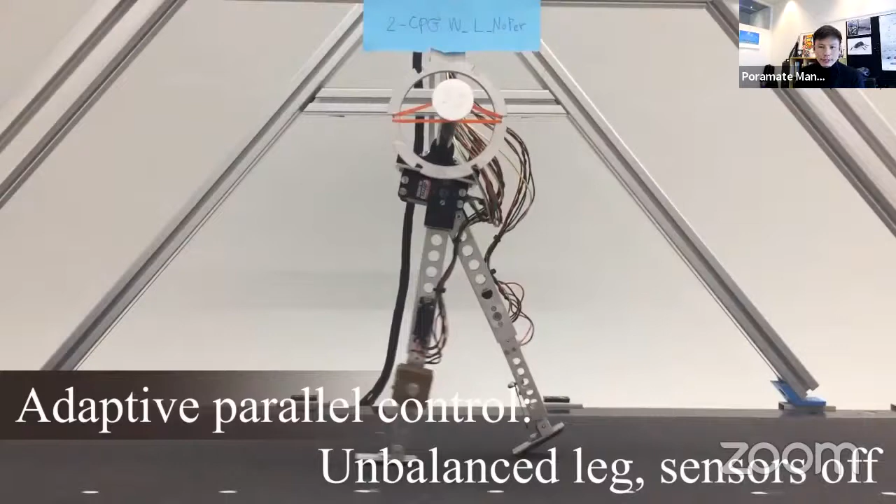Even when we change the treadmill speeds, the robot could also readapt its locomotion on the fly, in real time. With this, we're translating this control technique from bipedal robot into exoskeletons. This is the project called EXOVIS. So this is the work in collaboration with the Rama Hospital and Mahidol University, where we want to have these exoskeletons for humans to regain their walking ability, such that, first, the exoskeleton needs to be able to learn how a human walks by itself. You don't need to sit and then program it.

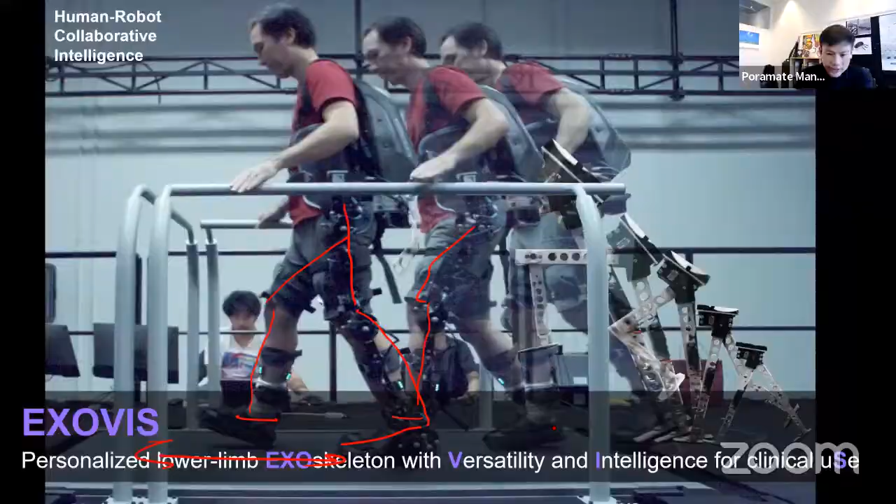So once you wear the exoskeleton and you start to do your own movement, after a few steps, the exoskeleton should be able to learn how you walk, to capture your locomotion behaviors. And even if you change the speed of the treadmill or walk up and down stairs, the system should be able to readapt to those new situations. And here, this is our research facility, our gait lab at VISTEC. So we have the force plate on the stairs, we have exoskeletons, and also we have motion capture that can track the human movements.

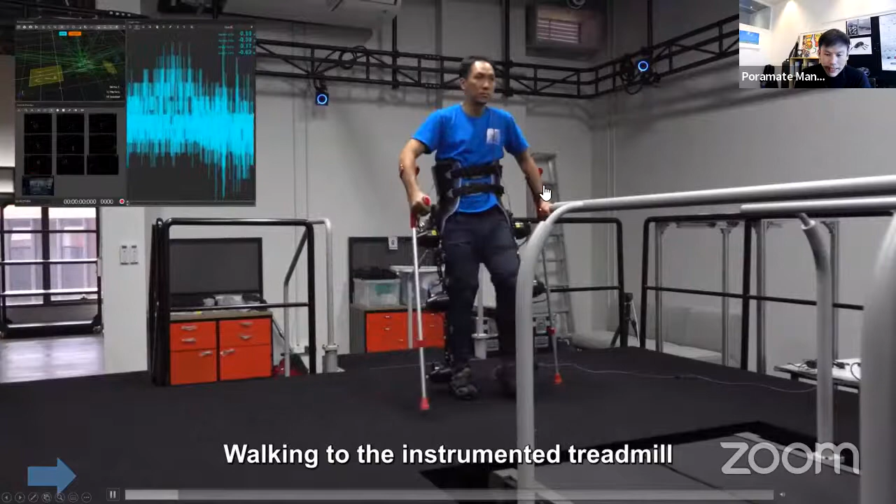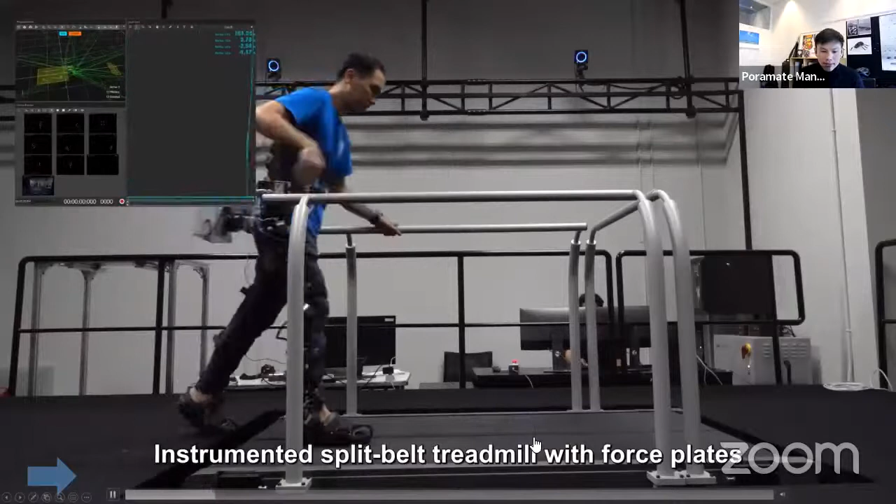And when the subjects come to this treadmill here, we have the split belt treadmill, where you can change the speeds on the left and right belts independently. This can be used to simulate a kind of asymmetric locomotion for stroke patients. You could also increase the angle of the treadmill, and with these facilities we now have some results, which maybe later I could share with you. This is the learning mode. So you wear the exoskeleton and try to walk with it. Basically, when you walk with the exoskeleton, you teach it how you would like to walk. And after a few minutes of learning, the exoskeleton can remember your locomotion and use that to assist your locomotion afterwards.

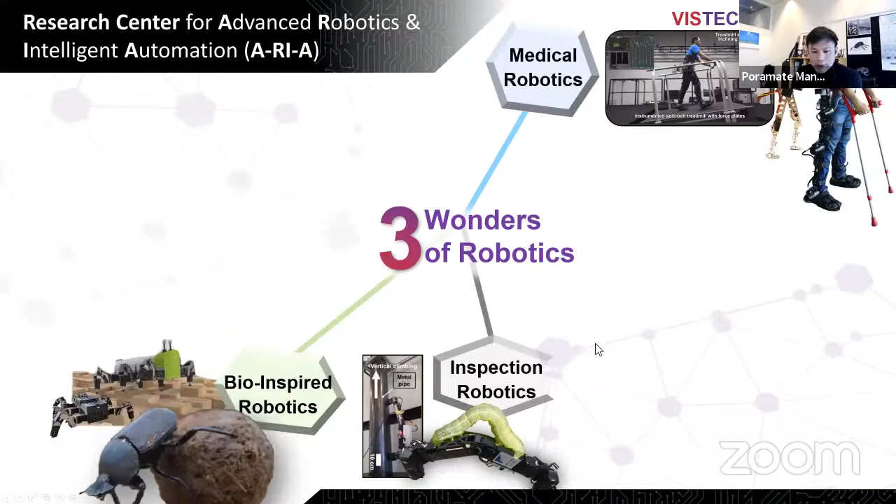So what I have shared with you today is basically my main research, covering bioinspired robotics, looking at nature, and also inspection robotics. And lastly, I touched a little bit on medical robotics. So these are our three main research areas at VISTEC. Right now we have the Research Center for Advanced Robotics and Intelligent Automation at VISTEC, or ARIA. In fact, we also have other domains; in total, we have what we call the 7 wonders of robotics. So we also research industrial robotics, soft robotics, cognitive robotics, and service robotics there.

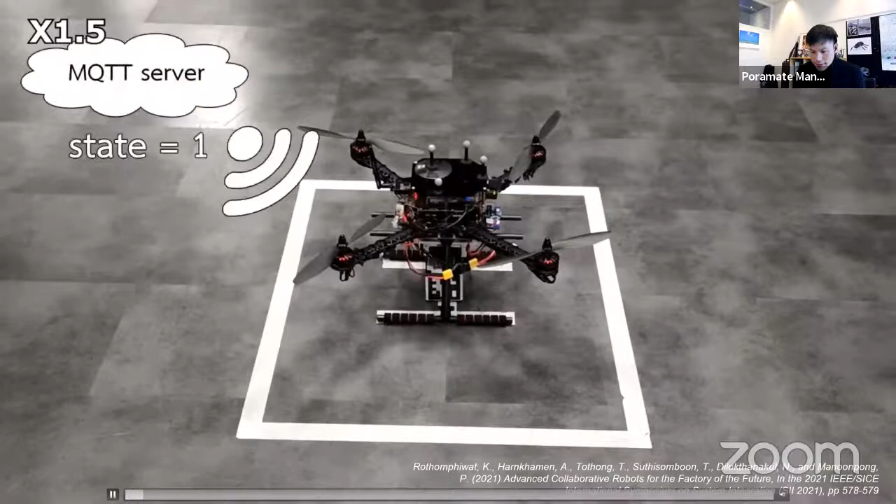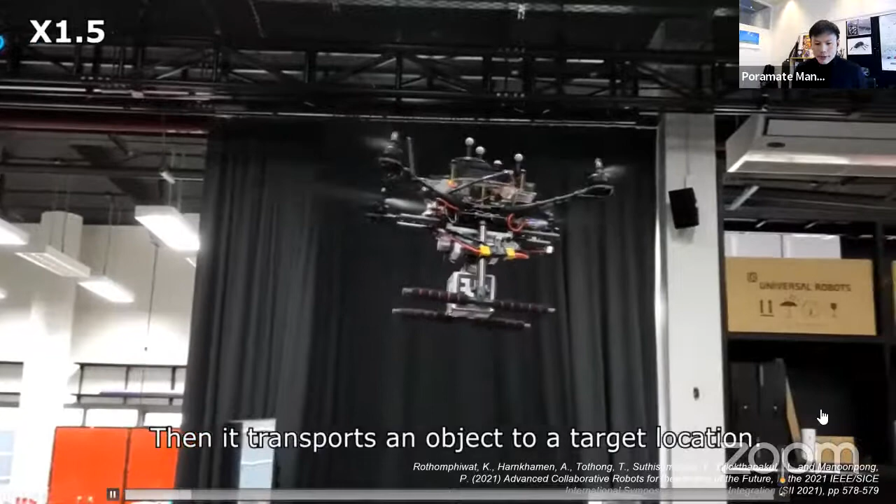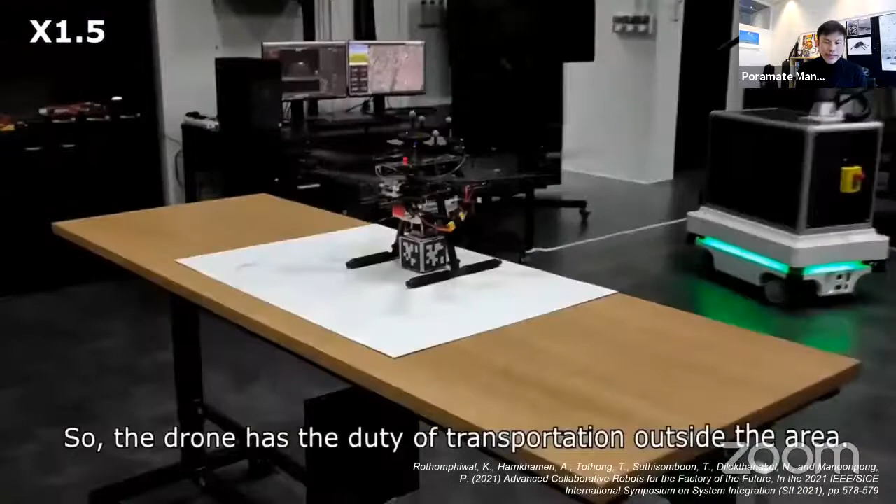So lastly, I want to show you the last video, a demo showing that we can use different robots. Okay, so this is the video where we use different robots, like the drones here, to fly and transport objects above the ground. And when it comes to certain locations, the drone can drop the objects. And here the drone can autonomously send the command to say that my mission is complete. And then the mobile robot will come. I'll just go a bit faster.

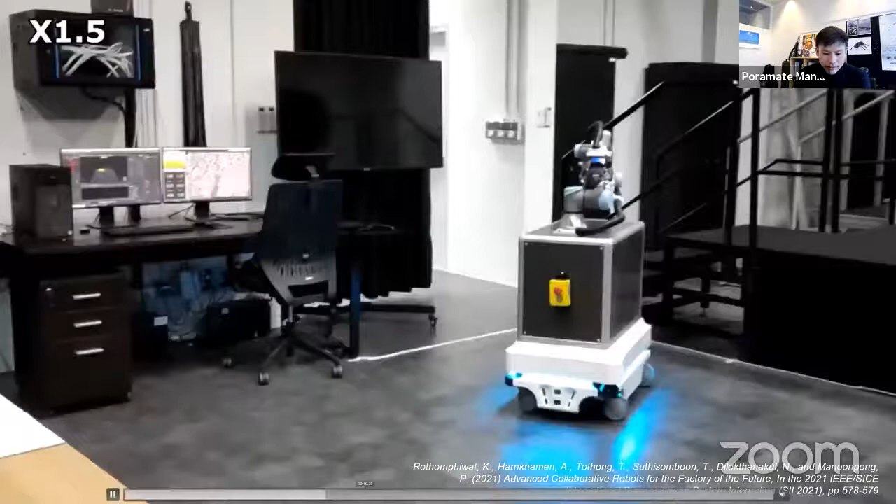The mobile robot will come from the understanding of the drone communications, and then come to pick up this object by itself. Once it sees the object, it grabs it, and then it moves to the conveyor belt here. And when the robot places the object on the belt, it sends the command saying that my mission is complete, and then the belt will autonomously move to the second spot.

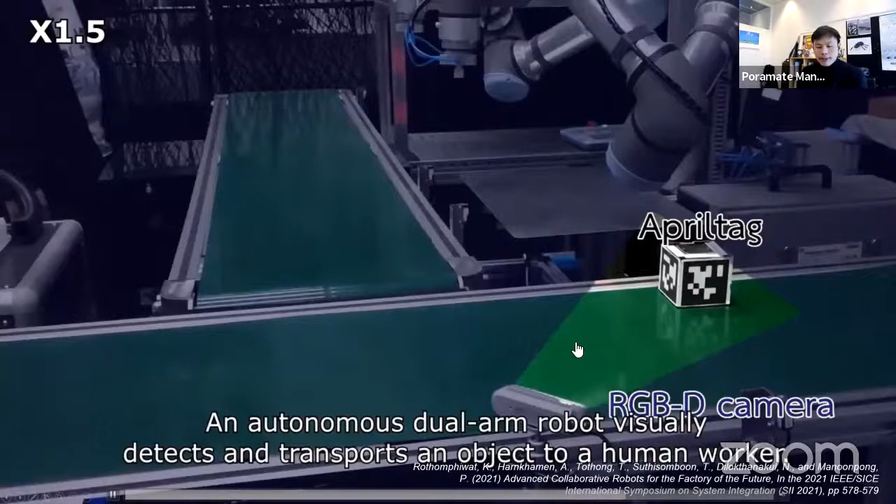And once the camera sees the objects, it sends the command from the conveyor belt to the robot arms to give this to the inspectors. And after the inspector inspects the objects or the item here, after inspections, he can send the object back, and the robot arm can place the object into the chair. So basically, here we show that you can exploit different features of different robots to do this kind of logistic task.

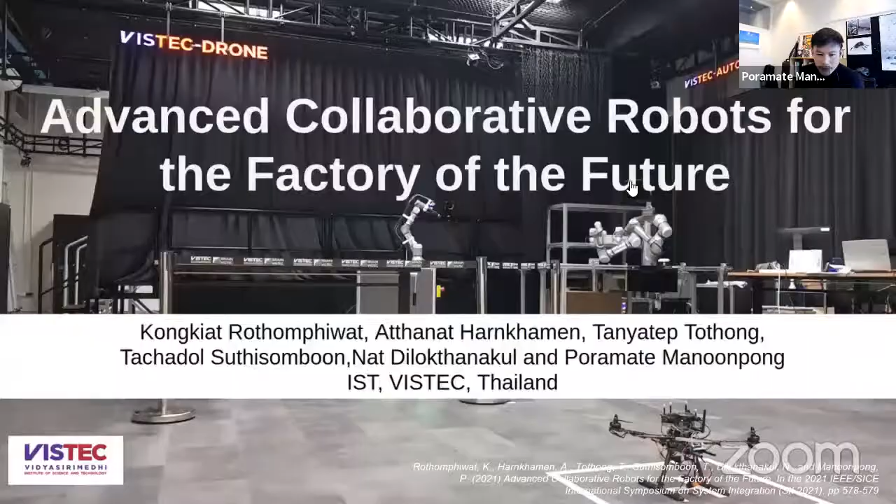So with this, I would like to end my talk. Basically, I hope that I give you a bit of inspiration where we can learn from nature to find new technology for robotics. And I believe that nature could be a seed of good information so that we can build up our robots in the future to become our friends. So with this, I would like to thank you for your attention.

Thank you so much, Professor Poramate. It's inspiring and also very exciting. I really envy you for saying you enjoy this kind of work. We may not have time for questions, but I would like to ask just one question. You've been working with many kinds of animals, observing the motion, and using robots to mimic the motion. Did you find that the natural motion given by nature or by God is already the optimal one, or would you be able to even improve it?

This is a really good question. I would say the motion of nature is not optimal. Nature tries to find a solution that is good enough to survive. So even when we mimic those locomotions for robots, we further adjust or fine-tune them to fit the robots. And I have discussed this problem with various colleagues, and we came to the conclusion that there's no unique optimal solution in nature. It depends on the scale. If we look at the macro scale, basically we are fat, thin, we walk differently. And that's also how we change our morphology over generations.